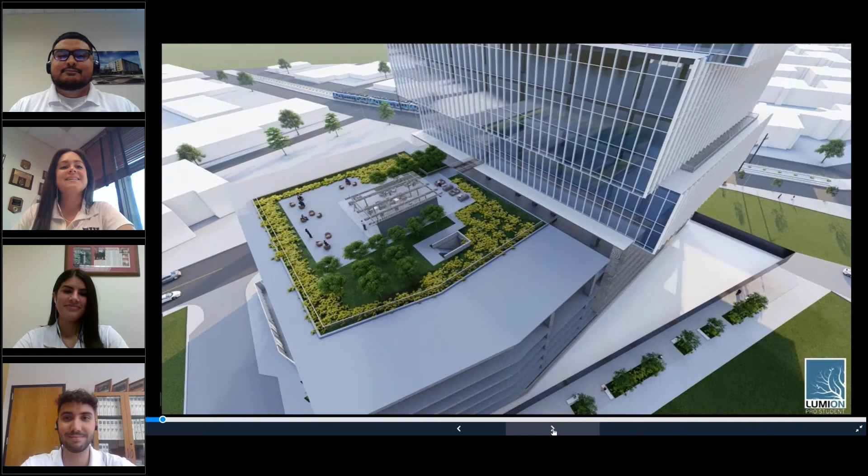As you can see, joining me today are my wonderful teammates. I'll start with our General Superintendent, Rico Salguero, our Safety Manager, Marco Garcia, and our Lead Estimator, Amber Zabala.

Here at Pinnacle, we pride ourselves on the amount of knowledge we've both shared and gained through our 20 years of past experience. As a Miami-based office, expanding our services nationwide has been critical to our success. Through our constant search for new challenges, we've successfully achieved an EMR score of 0.79. We also proudly hold the title of a Gold ABC STEP member company and have achieved 47 construction awards throughout our time.

Our attention to detail and constantly adopting innovative construction methods have allowed us to push new frontiers in the timely and successful completion of our projects, all the while maintaining our clients' visions at the forefront of our focus. We stand true to our core values of team fluidity and loyalty, and know that without our collaborative and unified team, we would not have the successes that have brought us to where we are today.

As I mentioned, our team has been successful over the past 20 years, completing over 100 projects throughout the United States, including 74 office buildings. We wanted to highlight a few of our recently completed projects that are most similar to the Epic One office building. First, we have the Park Avenue West office building in Portland, Oregon.

It was completed in 2016. Similar to the Epic, this high-rise office building was constructed as a cast-in-place structure with an exterior curtain wall system. We highlighted this project because the envelope was created to meet the LEED Silver certification criteria, and it left us with great knowledge on the construction impacts of building near the MAX light rail line.

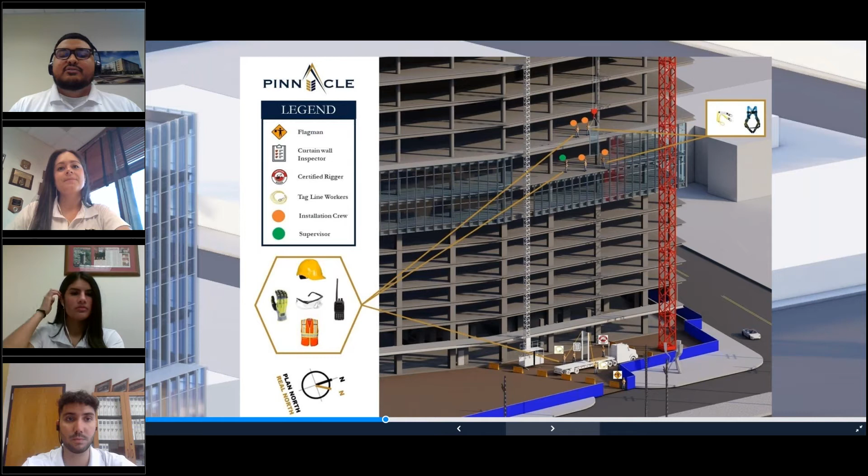At Pinnacle, quality is of utmost importance. Procore is an important tool that Pinnacle uses for project management and quality control tracking. It's a cloud-based platform that can be accessed around the clock. Documents including inspection reports, RFIs, submittals, and progress updates are some of the many features that can be accessed through Procore.

Pinnacle's quality control team works hand in hand with the commissioning consultant and the owner's commissioning team to ensure Epic One operates as intended. The owner's building operator and staff will be trained for maintenance and operations post-turnover. The individuals within this diagram work in tandem to ensure the entire project exceeds the owner's expectations.

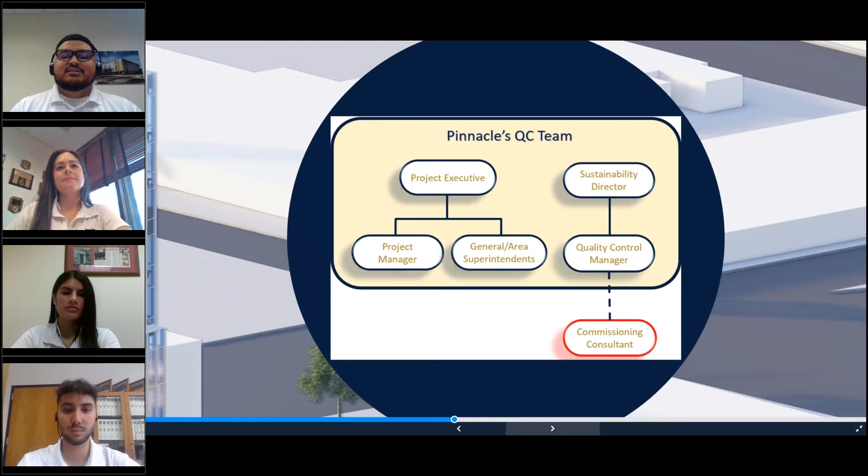Next, Rico will be introducing our project planning information.

Thank you, Marco. Here at Pinnacle, we believe that a successful project starts with clearly defined goals, and we like to think of our plan as a roadmap for our stakeholders.

Prior to creating the schedule, we have incorporated site logistics to mitigate any potential risks. In our site utilization plan, we have identified various critical components, starting with the temporary close down of Hawkins Street in order to obtain site egress and not disrupt ongoing traffic.

We have also identified the ideal locations of the temporary trailers and utilities, concrete washouts, and laydown staging area. Lastly, we have also pinned down the designated A and B work zones, ideal buck hoist locations, and flat top tower crane locations in order to maximize productivity.

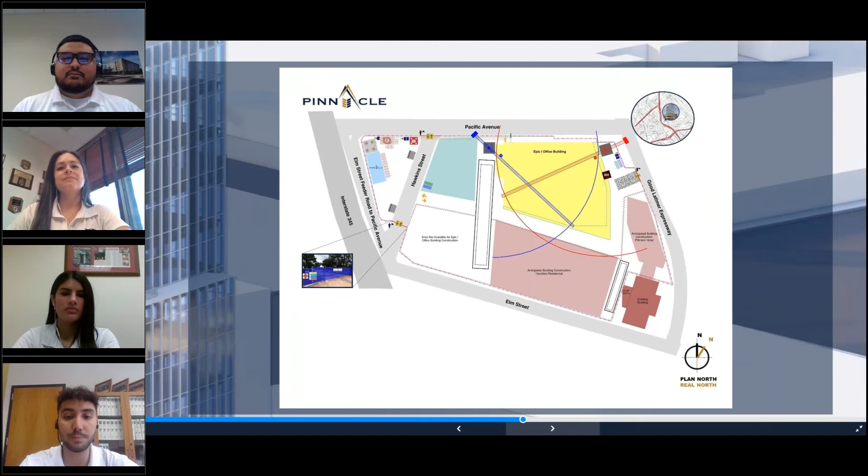Next, we have the area breakdown. This displays how we went about dividing the foundation, superstructure, and exterior curtain wall sequence of the project into its designated zones and implemented it into the schedule.

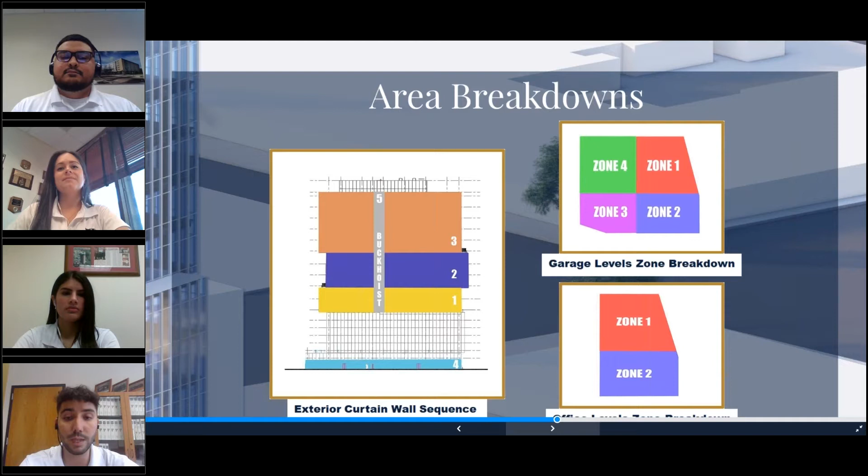As you can see, this is our breakdown of the foundation and garage levels of our vertical and horizontal structural elements, which consist of 4 zones.

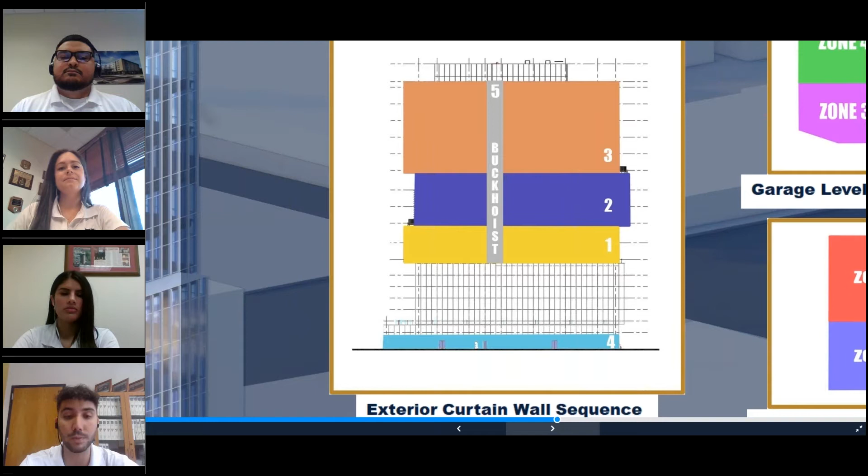We took advantage of zone 1 and 2 for the office levels to perform all remaining structural work. Lastly, we have the exterior curtain wall sequence, which is comprised of the 7th and 8th floor, then 9th to 11th, 12th to 16th, first floor storefronts, and finally back to the buck hoist strip. This sequence was displayed and carried out into the project schedule, respectively.

Next is an overview of the proposed project schedule, which we are confident for success and plan to have building turnover in 24 months. As shown, we have established essential dates and durations for the distinct sequences of work in order to perform operations safely, efficiently, and allow for trades to begin work earlier, putting the project ahead of the proposed schedule.

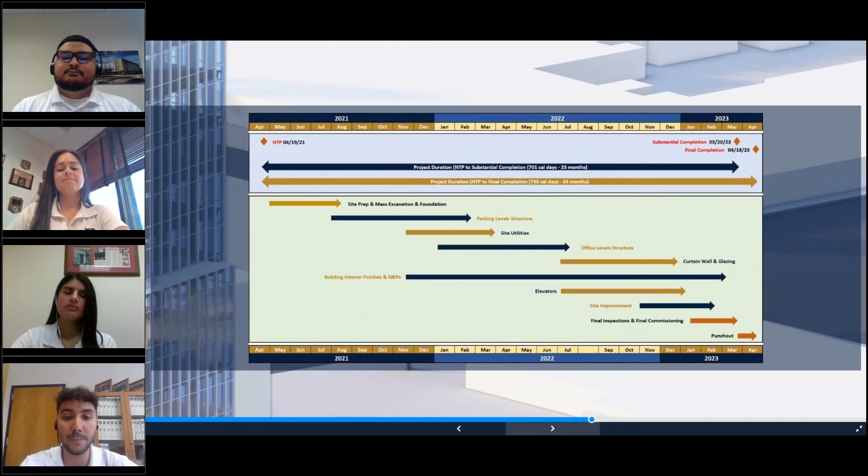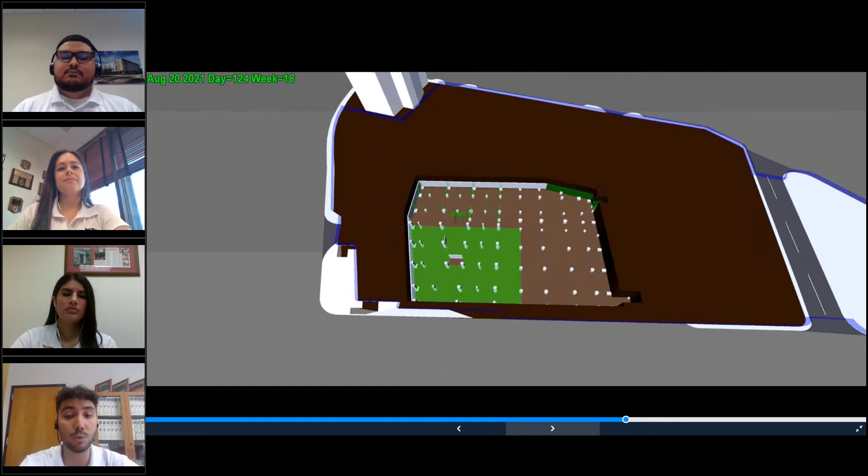Concurrently with mobilization, we will start site prep and building pad mass excavation while commencing the dewatering process. We anticipate this to take approximately 3 months. Following that, we begin the foundation work in zone 1 and then continue to zones 2, 3, and 4.

Successively, the parking level structure commences, and immediately the erection of structural members will be carried out. Other trades will be released once the parking level structure is 50% complete. Site utilities will begin work, including the detention structures around the building, while MEPs and rough interior work for the building's interior will also be released.

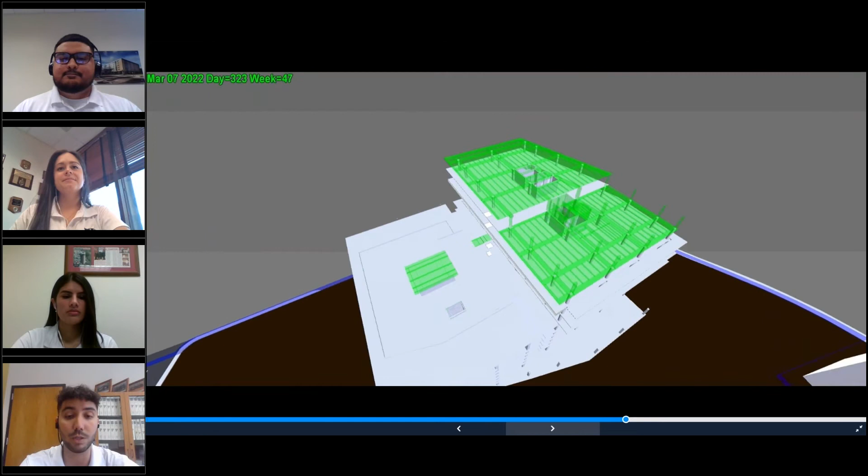As stated previously, we took advantage of zone 1 and 2 for the office level structure, which allows for a very rapid vertical erection of structural elements. This shows us topping out at 14 months due to this.

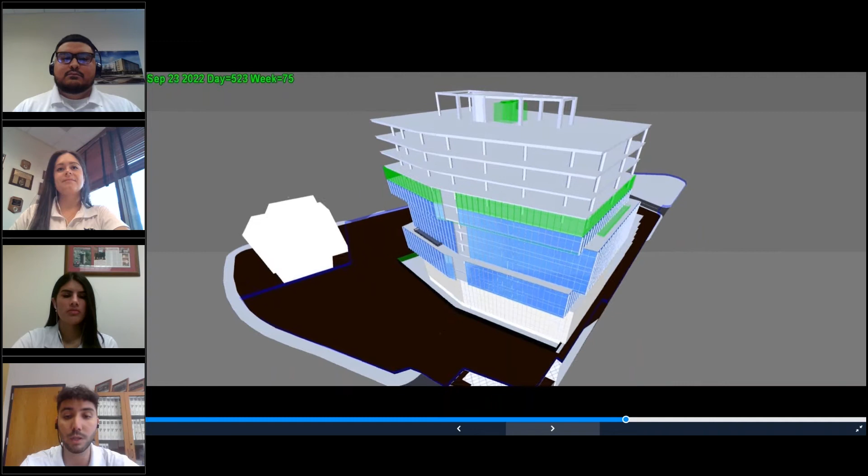After topping out, we will commence installation of the exterior curtain wall system. This process will be done floor by floor. We expect the bulk of the work, with the exception of the buck hoist strip, to be completed in roughly 3 months. Meeting this milestone releases trades to commence dry-in.

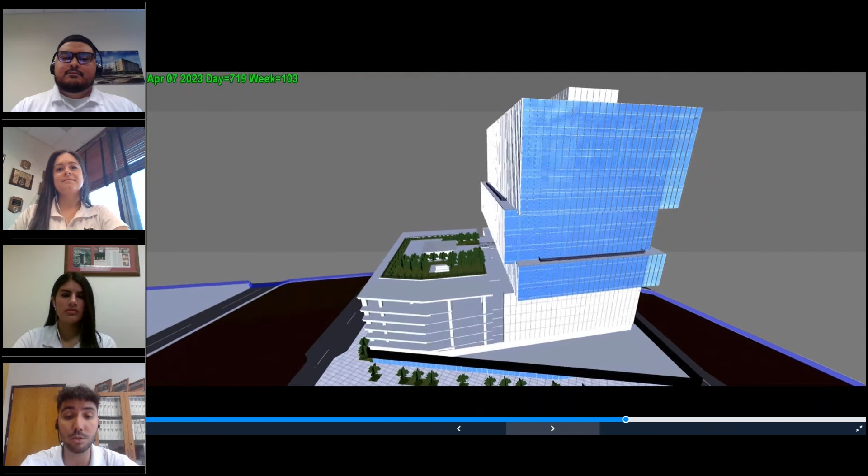While this is ongoing, various trades such as elevators, interior finishes, and site improvements will be released. During the final months, the commissioning process and final inspections will occur. We expect building substantial completion to be 23 months and final completion to be 24 months from the notice to proceed. Next, we have Amber to elaborate on the bid summary.

Good afternoon. Pinnacle's initial price is about $76.5 million for our bid lump sum, while our revised price is about $86.4 million for the GMP.

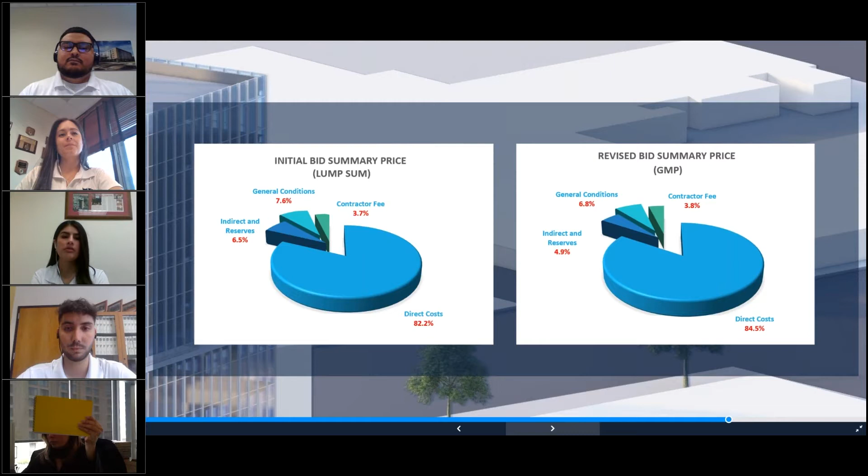For both bid summaries, the general conditions remain the same price, but our initial proposal comprised about 7.6% of the total price and 3.7% for our fee, whereas our revised was 6.8% for the general conditions and 3.8% for the fee. Since we are self-performing concrete, the scope of work remains consistent throughout both steps.

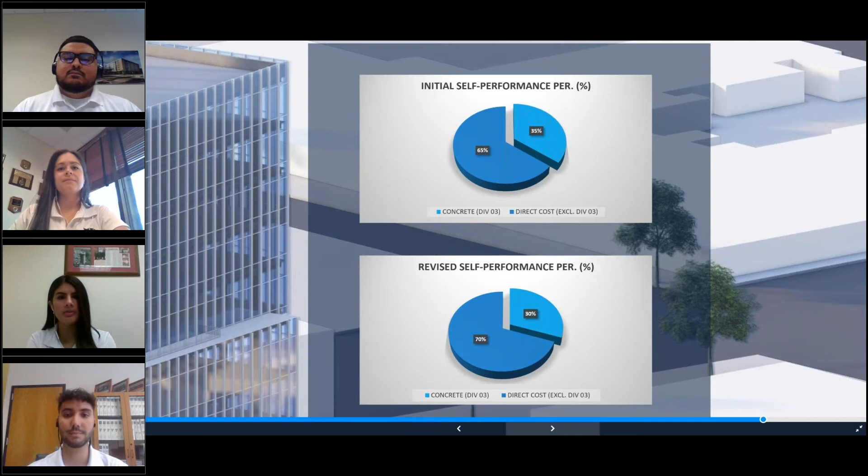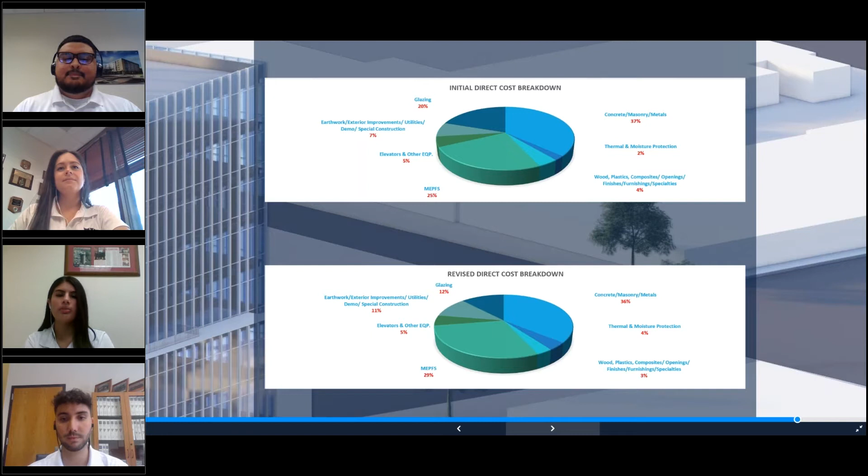The percentage ratio for the concrete changes proportionally as our revised proposal differed from our initial submission, from 35% to later 30%. During step 2, our prices were revised to account for some of our subcontractor choices, and the following charts highlight the differences in our pricing distribution. This allows for an overall idea of where our costs and resources are being allocated throughout the duration of the Epic One office building project.

And once again, here's Erica Fernandez. Thank you, Amber. Here at our firm, we take your vision to its pinnacle point. As a team, we'd like to extend our most sincere gratitude for giving us the opportunity to present on the Epic One office building. And with that, I'd like to open the floor for any questions you may have.